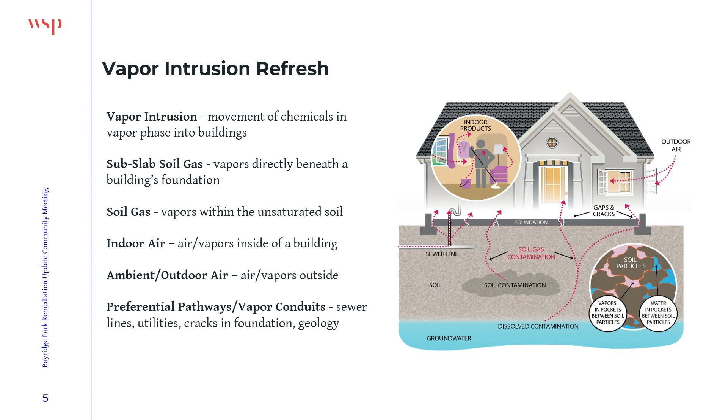I just wanted to touch on soil vapor extraction, SVE, and subslab depressurization, because for a while we've been hearing about the soil vapor extraction, and about a month or two ago we had a little pivot with these subslab depressurization systems. There were a few delays with getting the soil vapor extraction system installed, which can be typical with different sites. Because it's been prolonged, we want to make sure we're being protective of human health, and that's why we're pivoting and working on getting subslab depressurization installed at homes that have been offered air purifiers. Both the soil vapor extraction and the subslab depressurization systems would operate together.

But I want to quickly distinguish the two. Soil vapor extraction is a treatment system. When used for any site, it's a cleanup technology that can remove source. In this area, it's meant to control the extent and migration of the soil vapor plume. Subslab depressurization is a mitigation system. It's going to stop or greatly reduce, and here prevent, those vapors from going below the foundation into the home. Instead, it redirects those vapors through piping and vents them above the roof line, stopping vapor intrusion.

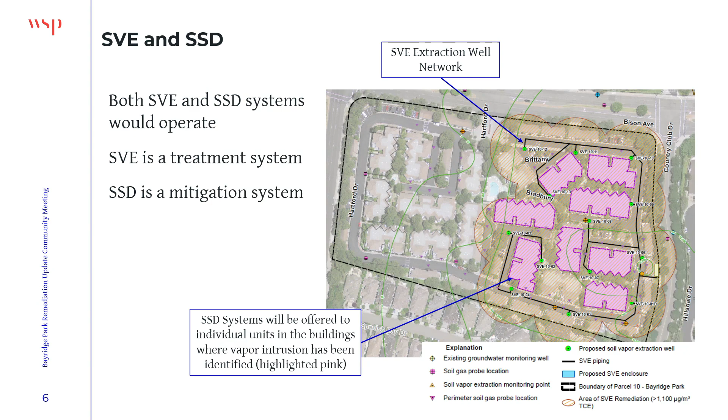There are so many concepts here we've brought up. We have soil vapor extraction, a cleanup technology, and subslab depressurization and air purifiers, which are both mitigation systems. I want to spend a few minutes distinguishing each one. When it comes to coverage area, soil vapor extraction is a site-wide cleanup option that addresses the soil vapor plume causing vapor intrusion in this community.

Subslab depressurization systems, right now, are an individual unit design. Those that have been offered air purifiers have been offered to move forward with getting a subslab depressurization system installed - it is individual home mitigation. Air purifiers treat the vapors that have already gone into the home. The big difference between air purifiers and subslab depressurization systems is that SSD addresses the chemicals before they get into the home. That's the next line, purpose.

I'll skip a little, but between SSD and air purifiers, the purpose of an air purifier is cleaning and addressing impacted vapors already in the home. SSD blocks those vapors from going into the home by redirecting them. But it's not a cleanup solution. Soil vapor extraction is the most effective way to remove vapors from below the ground so they don't get into the home, and can be addressed within that year or so.

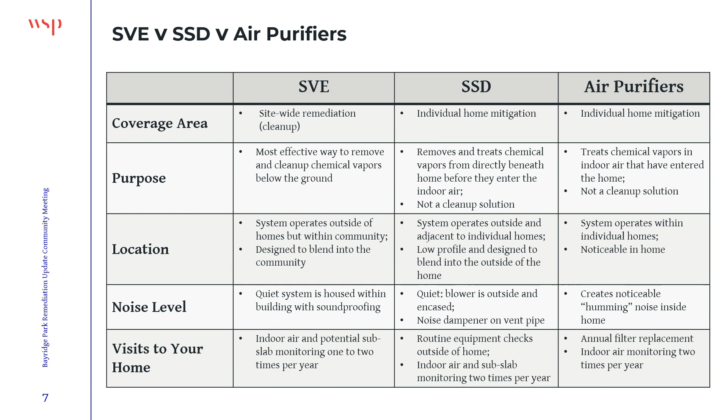In order to effectively remove those VOCs from indoor air, for all systems we strongly encourage and recommend routine indoor air monitoring. For soil vapor extraction, the visits are all on the exterior, dealing with the extraction wells and the building itself. With the subslab depressurization system, there's routine equipment checks, coming to the outside of the building monthly to make sure everything is operating correctly. As part of indoor air sampling, they would check those subslab probes to make sure the vacuum coverage is appropriate. With the air purifiers, there's also indoor air sampling, but with that annual filter replacement. So then we can jump back to WSP to talk about the soil vapor extraction system.

So I'm going to stop right there. Does anybody have any questions? Because that was quite a bit of information, and you're following along on a handout, so it's a little difficult. Tracy, no? Okay. Wait, remember we're videoing this, so I'm going to have you speak into the microphone. I hear you have a beautiful voice. And then I'm going to repeat it just to make sure.

I was curious about the monitoring for the indoor air - I didn't hear you correctly. Is that once a year, or is that more frequent? That's dependent on individual units from where you are within the community, and it's based on risk calculations that were done about two years ago. If you have specific questions on the frequency, we could talk about that more at the end and identify where you're at and find out what that frequency is supposed to be.

Then my other question would be with the SSR, is that right? No, SSD. Can you opt at any time to have that if you've had an air purifier, or is that something you have to get immediately? Is there a time frame? There is no time frame - same with the air purifiers, or even indoor air sampling. If you've never participated, or if you received air purifiers and then returned them because they were really loud, you can participate at any time.

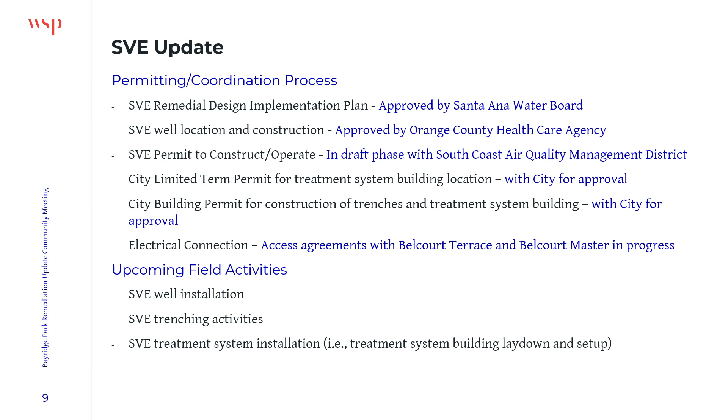And then last, but the one that needs the limited term permit, is the SVE treatment system installation, which will be the laydown of the building and also the installation of the equipment inside the building.

A notice of work was sent to all residents involved, including phone calls for those residents being impacted by the temporary blocking of certain parking spots.

As I said before, what you'll see out in the community is a drill rig with some support equipment, and we're thinking this will continue for about another two weeks, week and a half, somewhere in there, 15 days.

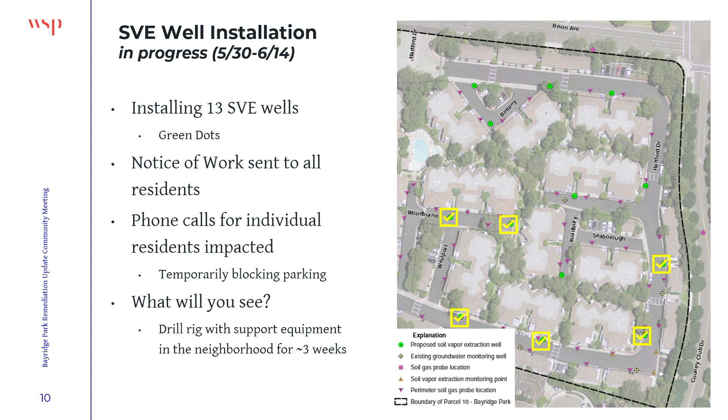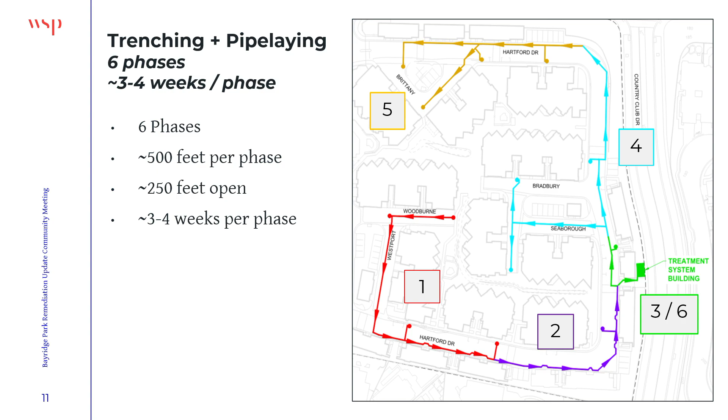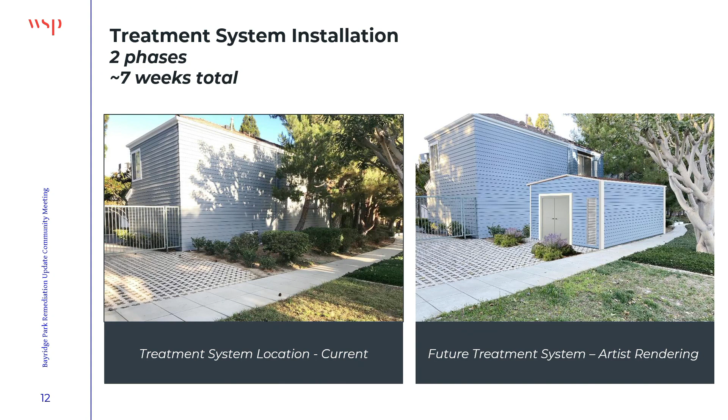The question was, where's the power coming from, and that's where they're pulling it. The only viable distribution location right now that can power the system is over in Belcourt Master.

And that's why there's that access he mentioned with Belcourt Master and Belcourt Terrace, because they have to trench from over there to get the system.

I have another clarifying question. Does that mean our vapor extraction shed is also going to be purifying Belcourt Terrace? No, they're going to have their own. They will have their own shed. They're going to have their own treatment system and wells.

I have one more question. I might have missed a meeting, but the last time I attended was at the community center down at the park. We did a very similar presentation. You put up the image of the building, and the comment was, you have promised us from day one that you would match aesthetics, consider design considerations, et cetera, and our comment at the last meeting was, it's a prefab shed, you're buying a prefab building.

It looks like a storage shed, okay? And you personally committed that this isn't what it's going to look like, that we will enhance the architecture and it will look just like all of your units. So I guess my question is, how about faux windows? How about some wood beam trellises like everything around our unit? Because that looks like something somebody puts their lawnmower in. Honestly, you personally addressed this and committed to us, and now you're coming back with this.

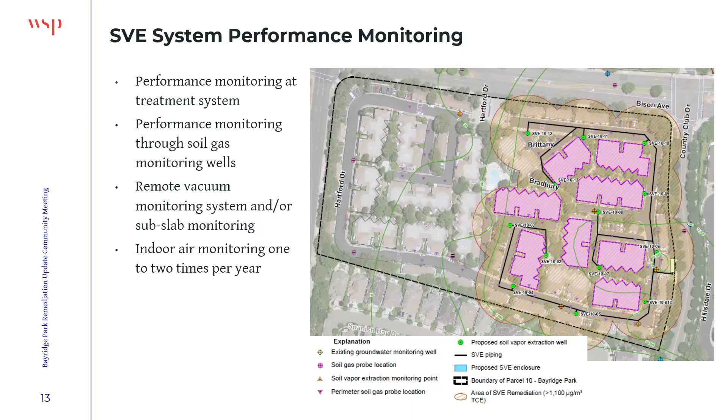Okay, an SSD—again, sub-slab depressurization system—those are for individual homes. That's what the next part of this presentation is, so I'd like you to start giving that. Make sure you orient people with the slide number and name. I think this is the last part of the presentation, probably 10 more minutes, and then we'll take all the questions, answers, and comments people have. If you can write them, that would be great, but I also realize some people want to identify with their comment, and if that's the case, I'll bring the microphone over to you.

Thanks, Tracy. So we're on slide 15 right now, the SSD system—I know it's sub-slab depressurization, but I might just say SSD for these couple slides. Thanks, Ken. So as we've repeated several times, we are offering these individual units to the 22 residents who have already been offered air purifiers. We've already been in contact with them, and we have a handful that are interested—there's probably some here, thank you very much.

So these are going to be installed on individual units, not building-wide—at this point it's individual units only. It's very simple: if you look to the right in the picture, this is an example of a simple unit installed on the side of the house. There's piping underneath your home that extracts vapors, and a fan pulls those vapors up to the roof line. Like Jessica mentioned, this prevents the vapors from entering your home.

So you think of it as vapors that are going to seep up into your home. Instead, that extraction point is going to pull all those vapors up and out, and it's not going to allow them to go into the home. They're very quiet, and they're on the outside of the home. There's a fan, but there's also a dampener, so that's positive. I know some of you have air purifiers, and there's been comments that they're very loud, so this is an option. You won't have to run the air purifiers if you have an SSD system operating. This is a better way to remove those vapors. They're not going to come into your home; they're going to be treated before they go in.

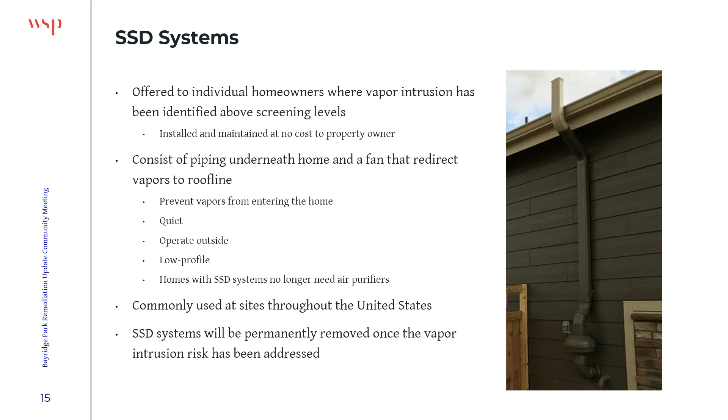This slide gives you two different layouts of the same thing. On the left, you're getting a diagram, and on the right, it's also a diagram, but we put it against some of the backdrop of Bayridge Park. I'm going to go from the bottom and move my way up. At the bottom, there's extraction piping that we mentioned. This is a horizontal pipe that they'll put underneath the home into the sub-slab. It's about 10 feet, and the goal is to get it in the middle of the unit, underneath the middle of the unit, so we can get good radius and the influence of all the air coming out. Once it comes out, it's going to connect to this pipe that goes up to the roof line.

In the pipe, there's going to be some inline units. It's a carbon treatment unit, which is actually like a miniature version of what the SVE will have, and this will treat any vapors that they pull out. Once it goes through the carbon unit—I should have mentioned before, the blower is above it, and that's what's actually pulling the vapors. So the blower is right above that, and we're adding a noise dampener based on comments we've received on everything else, just to make sure it's extra quiet. Then it's going to go to the roof line, and the air will be discharged above the roof line.

Just to give you a reference, on the right, if you look at the square, the blower is about 6.5 feet high, so the whole thing will be about 7 feet.

And then the one other item—do you want to pass these around? I brought some show and tell. So these are the vapor pins. All of this will happen outside of your home, but for the people that got offered it, we do need to put 2 monitoring points within the home, and these are called vapor pins. We did a little site walk at one unit today, so we found great locations in closets where these would be installed. You wouldn't even know they're in there. We would put 2 of these inside the home, and these are the things we would monitor every 6 months just to make sure we're getting good pressure.

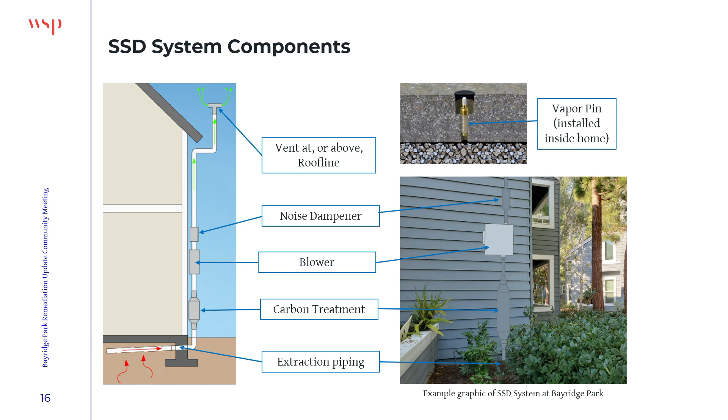This is actually just 2 more examples of SSD systems. We've been talking to our contractor about matching paint and making sure we paint the pipes and things. I think we're going to talk about the schedule of that in a couple slides, so I'm going to leave it there.

Question: On the noise that comes from the SSD, if I'm sitting on my patio having a family meal, are we going to be comfortable? How loud are they? Answer: It's like a little fan, but with the dampener, it's even going to be quieter—much quieter than the purifiers. It's just like air coming out, but we dampen it so you can't hear the whistling or anything.

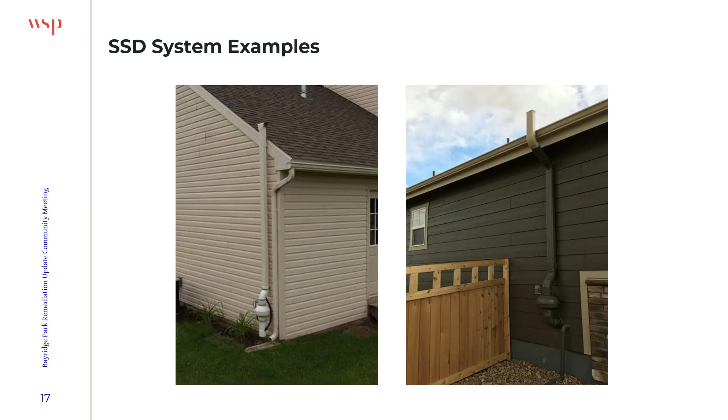I think our next slide is the schedule. That's on page 19, tentative schedule.

It's in the form of a Gantt chart. Starting on the left-hand side, there are two items going vertical: the SVE and the SSD. Reading across on the SVE side, you see the schedule regarding permitting and coordinating with the community — that's getting permits and approvals from different entities.

In order to operate the system, but also to implement and construct it, we're looking at implementation and construction starting around mid-September, right now looking like it starts on 9/11.

Below that on the SVE, you see the next public commission hearing, and what we're looking at on the city council hearing side of things. Below that, there's a time period in which we might be looking at an appeal period.

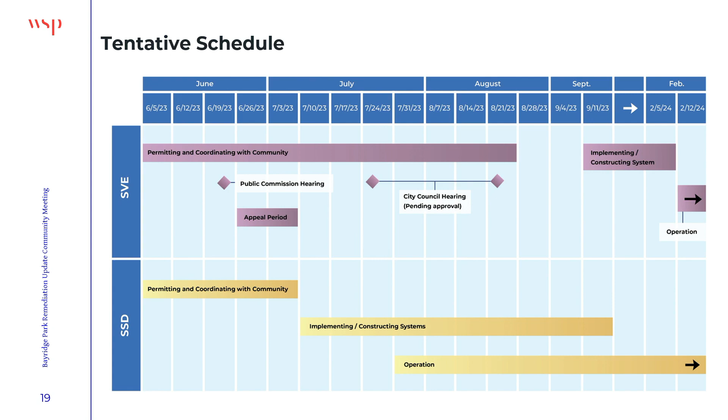The next section we're going to talk about is communications and preparedness, on slide 21. That looks like this — just three bullets.

We want to touch on some of the communication process we have in place. I'm sure you've all received the notices of work that go out anytime we're going to be doing work that could potentially impact the community, specifically in front of somebody's home. We send out notices of work to identify what work's going to be completed and a time frame associated with that work, to make sure people are aware of the process.

Recently, we've been implementing weekly updates via email for anybody signed up for that distribution list. If anyone isn't receiving those emails, please work with Sarah to provide your email address and we'll make sure to include you on future distributions. And as we mentioned earlier, this is specific to the SVE installation, the well installation work going on right now.

We're providing 24-hour and 48-hour notice to individuals where they're going to be directly impacted, where the drill rig's going to be in front of their house. They may not have access to a parking spot or a garage. And then also the day of, we're knocking on doors to let them know and remind them that we're there. So those are some of the steps we take to make sure the community is aware of all the work going on, in addition to the meetings we've had.